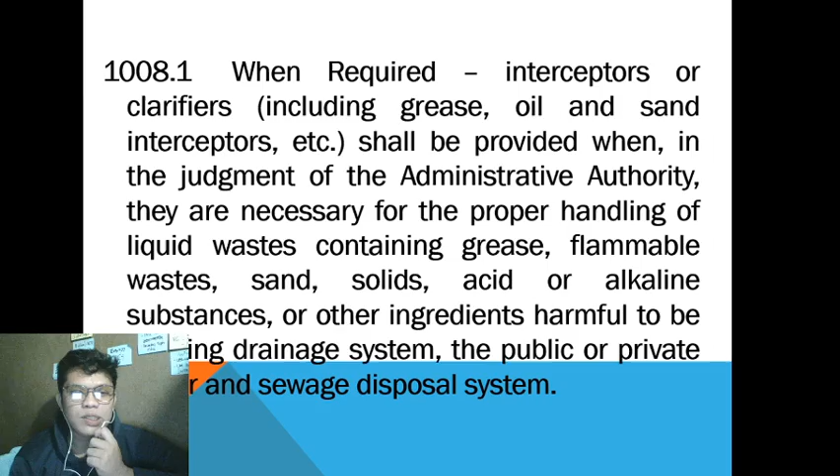We have 1008.1, when required: interceptors or clarifiers, including grease, oil, and sand interceptors, etc., shall be provided when, in the judgment of the administrative authority, they are necessary for the proper handling of liquid wastes containing grease, flammable wastes, sand, solids, acid or alkaline substances, or other ingredients harmful to the building drainage system, the public or private sewer and sewage disposal system.

We have point two, or the approval. The size, type, and location of each interceptor, clarifier, or separator shall be approved by the administrative authority in accordance with its standards, except where otherwise specifically permitted. No waste, other than those requiring treatment or separation, shall be discharged into any interceptors or clarifiers.

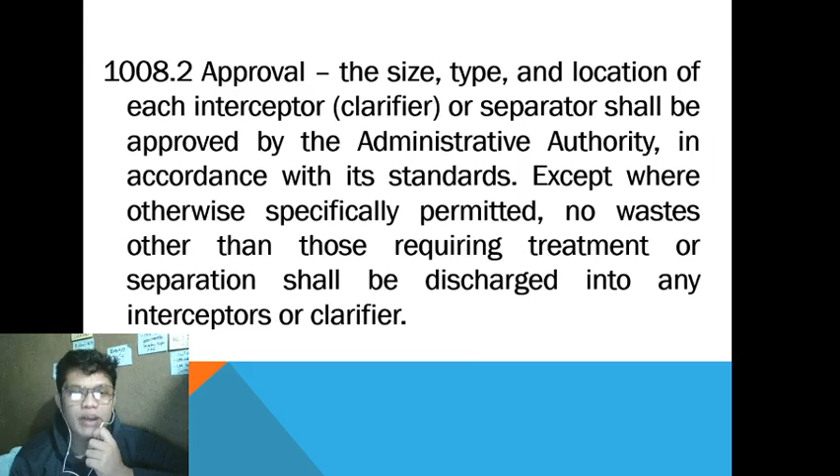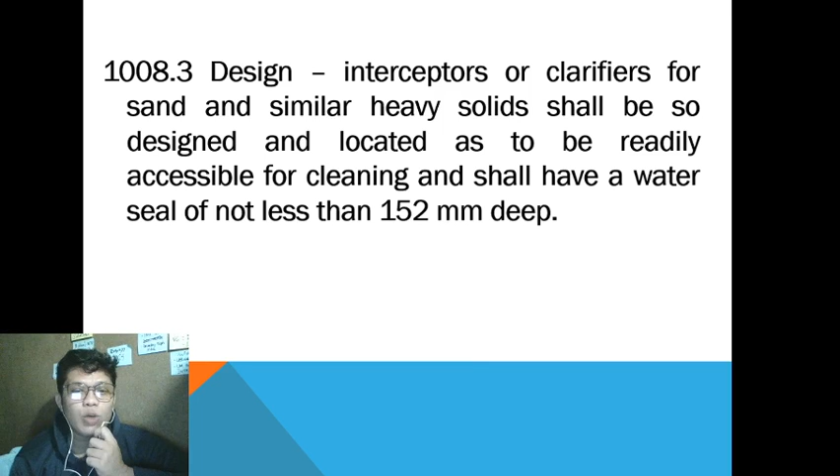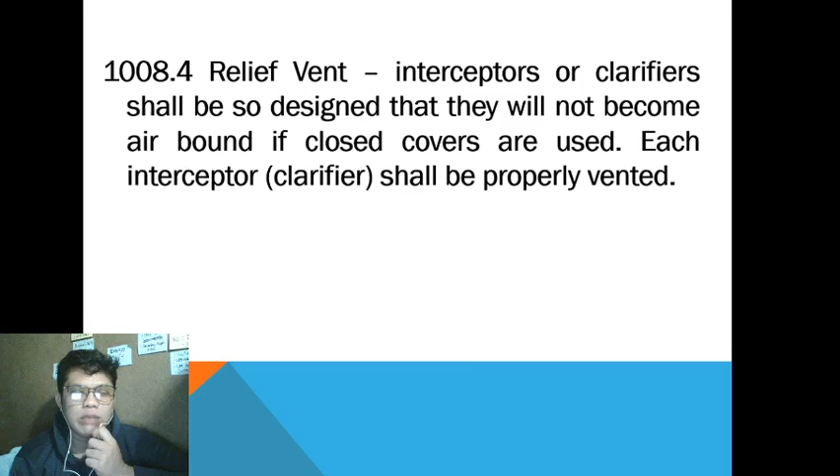We have point 3, or the design. Interceptors or clarifiers for sand and similar heavy solids shall be so designed and located as to be readily accessible for cleaning and shall have a water seal of not less than 152 millimeters deep. We have also point 4, or the relief vent. Interceptors or clarifiers shall be so designed that they will not become airbound if closed covers are used. Each interceptor or clarifier shall be properly vented.

We have point 5, or the location. Each interceptor or clarifier shall be readily accessible for servicing and maintaining in working and operating condition. The use of ladders or the removal of bulky equipment in order to service interceptors or clarifiers shall constitute a violation of accessibility. Location of all interceptors and clarifiers shall be shown on the building plan submitted for approval by the administrative authority.

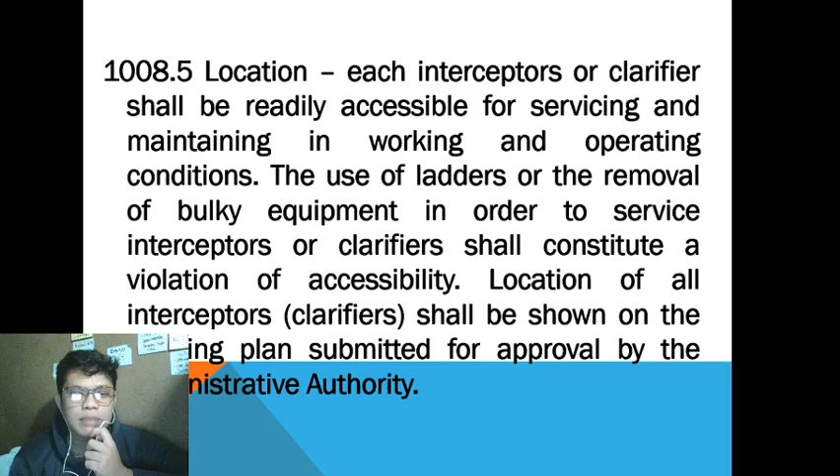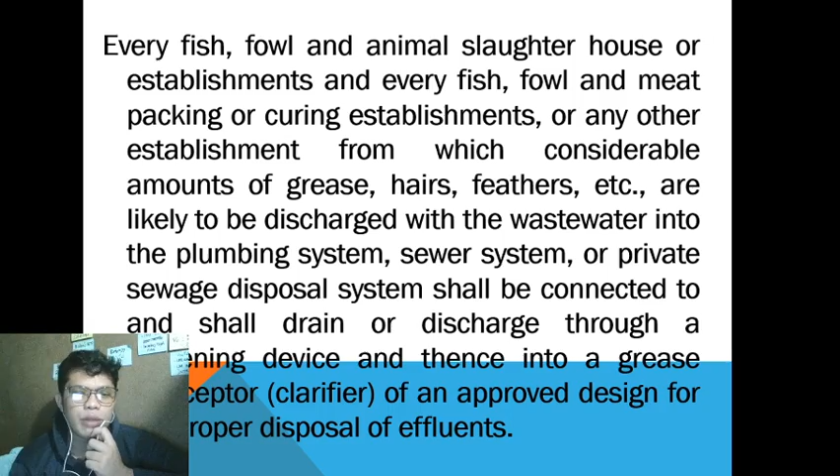Now let's move to section 1009, known as slaughterhouses, packing establishments, etc. Every fish, fowl, and animal slaughterhouse or establishment, and every fish, fowl, and meat packing or curing establishment, or any other establishment from which considerable amounts of grease, hairs, feathers, etc., are likely to be discharged with the wastewater into the plumbing system, sewer system, or private sewage disposal system shall be connected to and shall drain or discharge through a screening device and thence into a grease interceptor or clarifier of an approved design for the proper disposal of effluents.

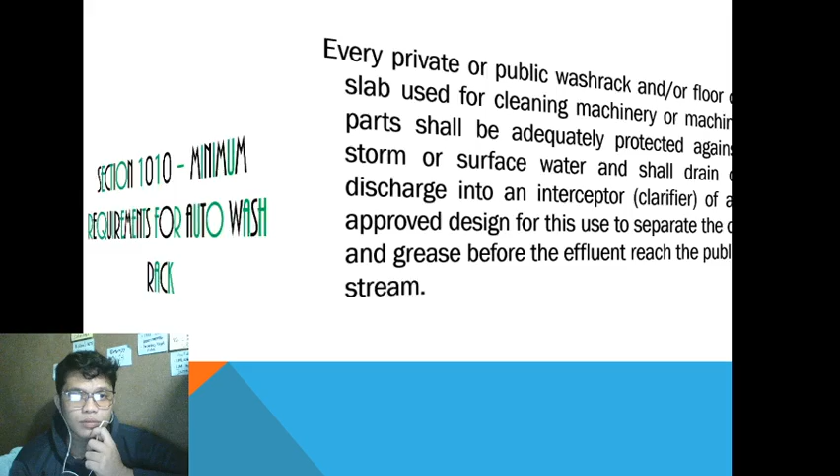Let's have section 1010, the minimum requirements for auto wash racks. Every private or public wash rack and/or floor or slab used for cleaning machinery or machine parts shall be adequately protected against storm or surface water and shall drain or discharge into an interceptor or clarifier of an approved design for this use to separate the oil and grease before the effluent reaches the public stream.

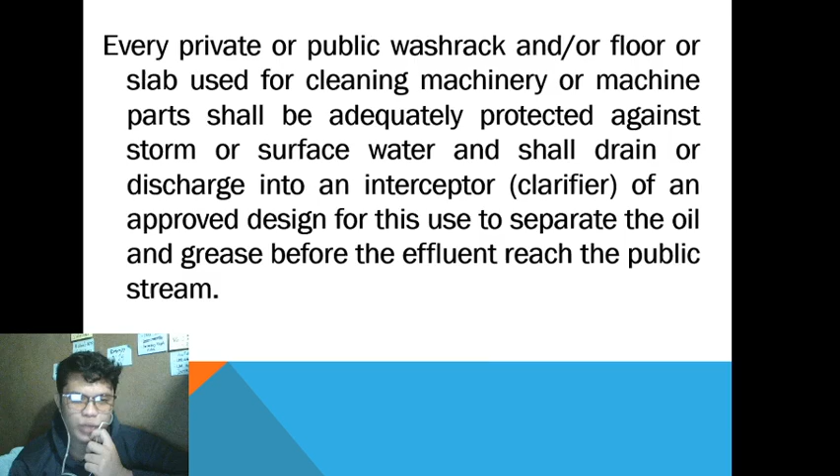Let's move to section 1011, or what we call grease traps. We have actually 8, I guess, if I remember correctly. We have 1011.1. When in the judgment of the administrative authority, waste pre-treatment is required, an approved type grease trap complying with the provisions of these sections shall be installed in the waste line leading from sinks, drains, and other fixtures or equipment

in establishments such as restaurants, cafes, lunch counters, cafeterias, bars and clubs, hotel, hospital, sanitarium, factory, or school kitchens, or other establishments where grease may be introduced into the drainage or sewer treatment or private sewage disposal. A grease trap is not required for individual dwelling units or for any private living quarter.

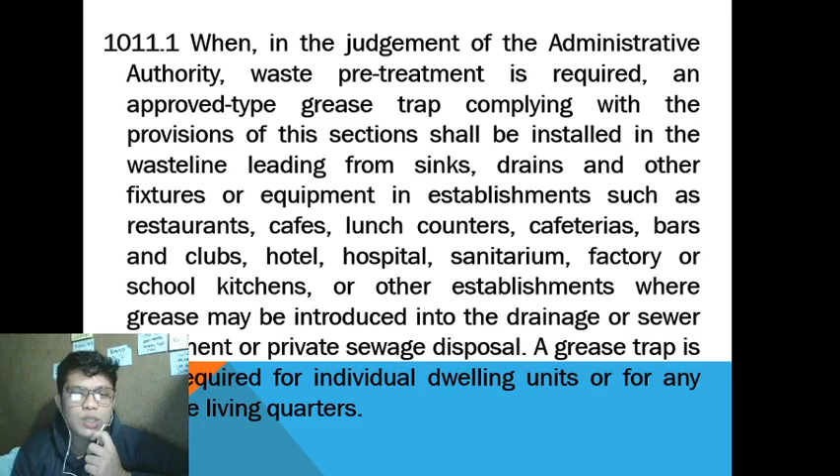We have point 2. No individual grease trap shall be installed for a facility that has an approved rate of flow of more than 3.4 liters per second nor less than 1.3 liters per second, except when especially approved by the administrative authority.

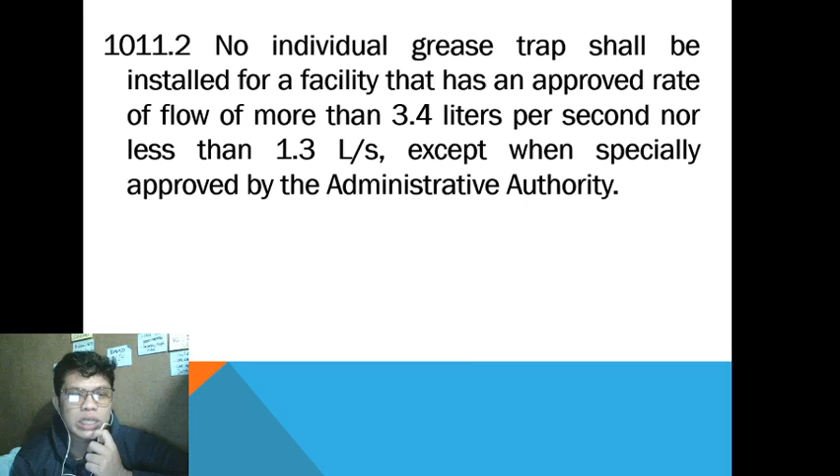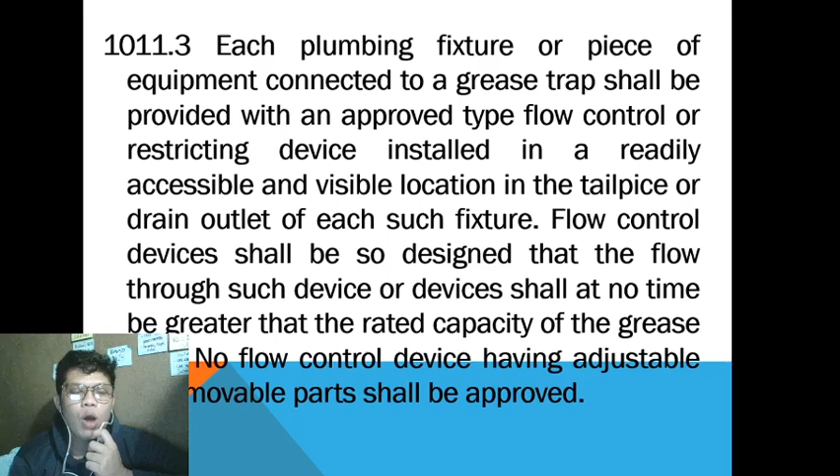Let's have point 3. Each plumbing fixture or piece of equipment connected to a grease trap shall be provided with an approved type flow control or restricting device installed in a readily accessible and visible location in the tailpiece or drain outlet of each such fixture. Flow control devices shall be so designed that the flow through such device or devices shall at no time be greater than the rated capacity of the grease trap. No flow control device having adjustable or removable parts shall be approved.

We have point 4. Each grease trap required by this section shall have an approved rate of flow which is not less than that given in table 10-2 for the total number of connected fixtures.

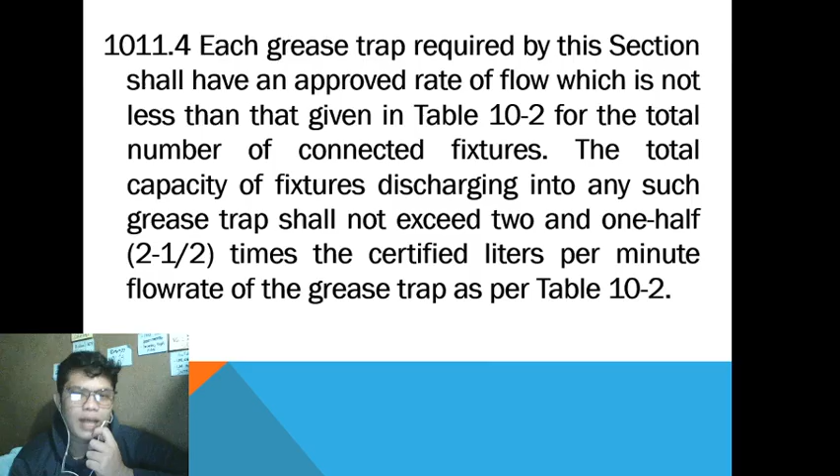The total capacity of fixtures discharging into any such grease trap shall not exceed 2.5 times the certified liters per minute flow rate of the grease trap as per Table 10-2. So, any grease trap installed with inlet more than 1.2 meters lower in elevation than the outlet of any fixture discharging into such grease trap shall have an approved rate of flow which is not less than 50% greater than that given in Table 10-2.

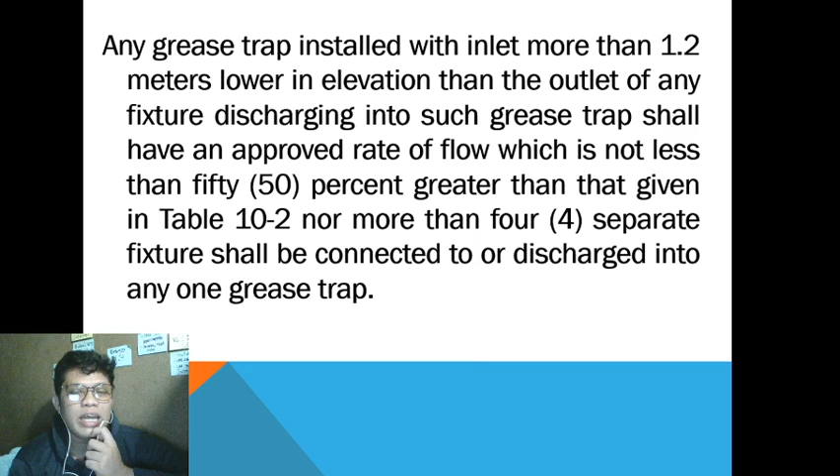Table 10-2. Not more than 4 separate fixtures shall be connected to or discharged into any one grease trap. Also, for the purpose of this section, the term fixture shall mean and include each plumbing fixture, appliance, apparatus, or other equipment required to be connected to or discharged into a grease trap by any provision of this section.

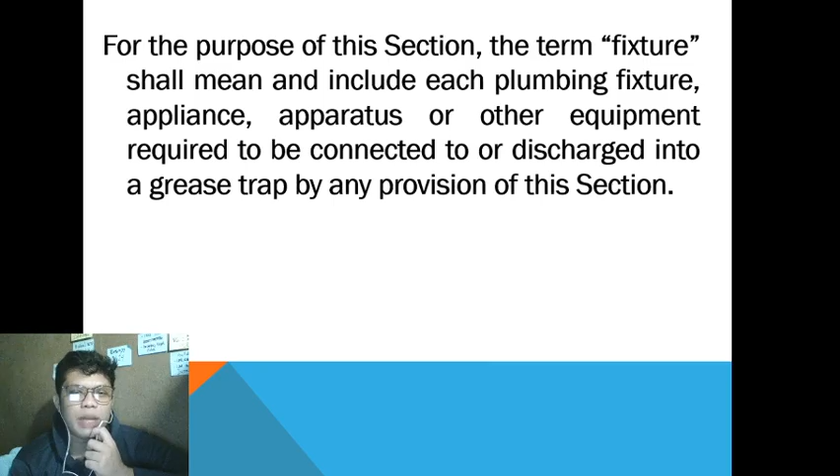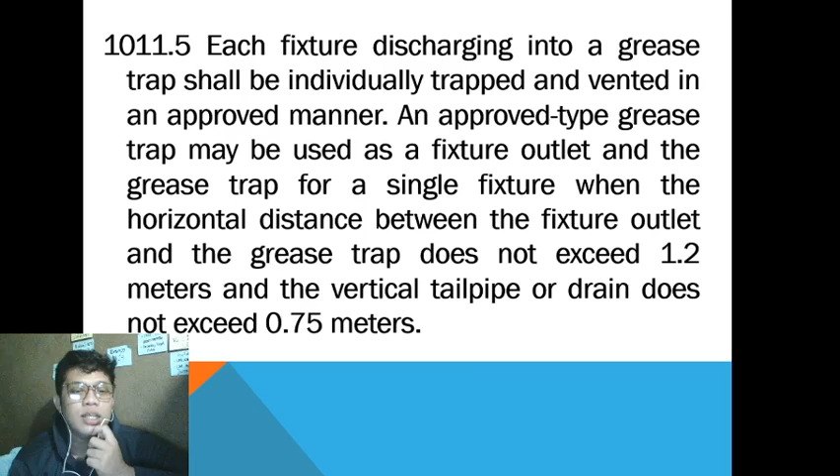So let's move to point 5. Each fixture discharging into a grease trap shall be individually trapped and vented in an approved manner. An approved type grease trap may be used as a fixture outlet and a grease trap for a single fixture when the horizontal distance between the fixture outlet and the grease trap does not exceed 1.2 meters and the vertical tailpipe or drain does not exceed 0.75 meters.

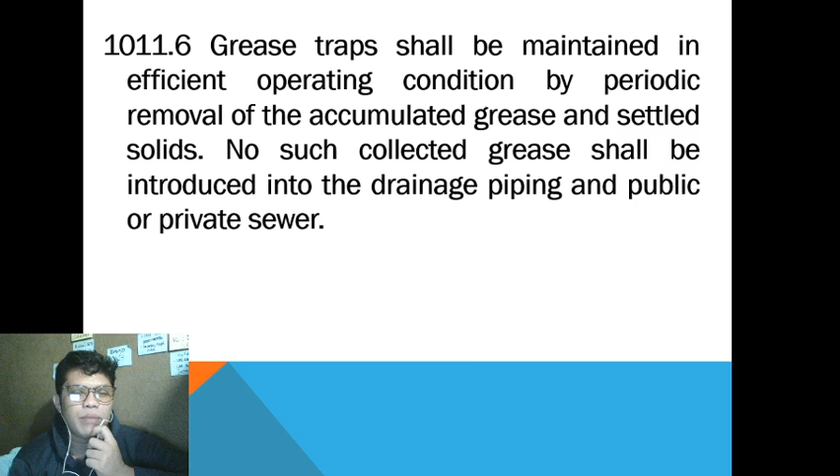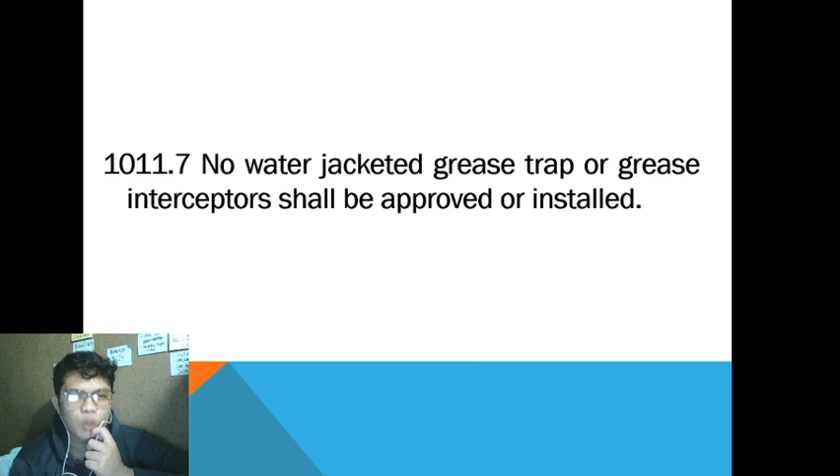We have point 6. Grease traps shall be maintained in efficient operating condition by periodic removal of the accumulated grease and settled solids. No such collected grease shall be introduced into the drainage piping or the public or private sewer. Second to the last, no water-jacketed grease trap or grease interceptor shall be approved or installed. That's according to 1011.7.

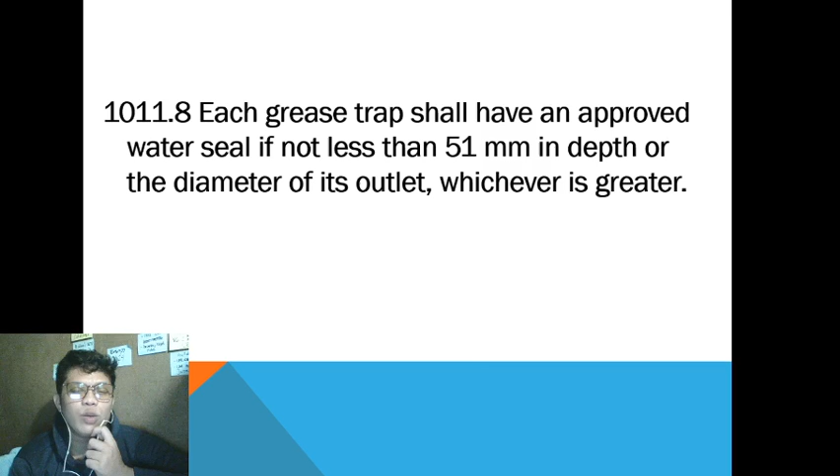And lastly, for 1011.8, each grease trap shall have an approved water seal of not less than 51 millimeters in depth or the diameter of its outlet, whichever is greater. So we have this last section, section 1012, also known as grease interceptors for commercial kitchens. It says that when grease interceptors are required, a commonly recommended sizing criteria is provided in Appendix B,

private sewage disposal system. So I prepared a video from YouTube for us to understand all of this, from section 1008 to 1012. So let's watch the video, and I hope that you will be able to understand some things about the interceptors, the grease traps, and all.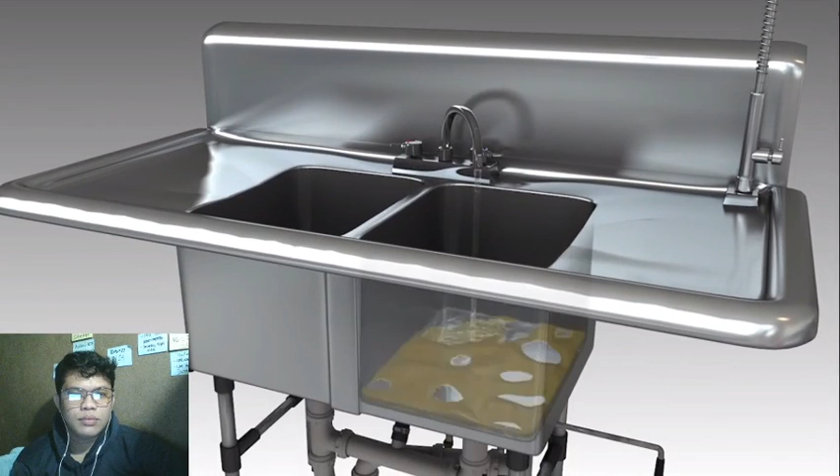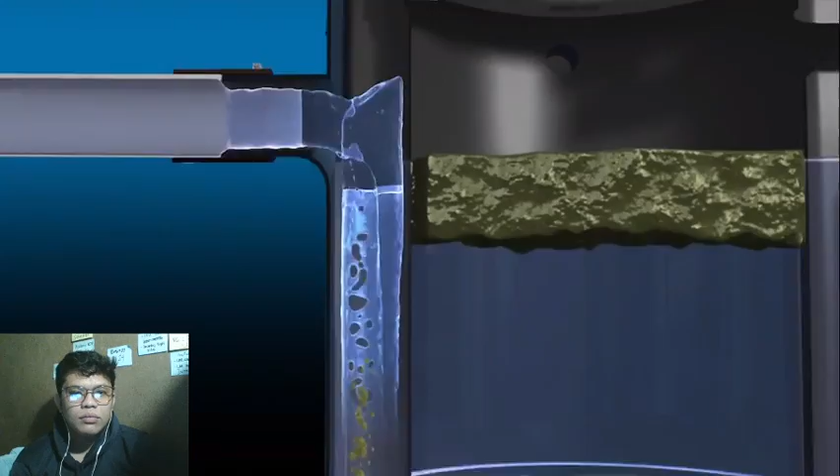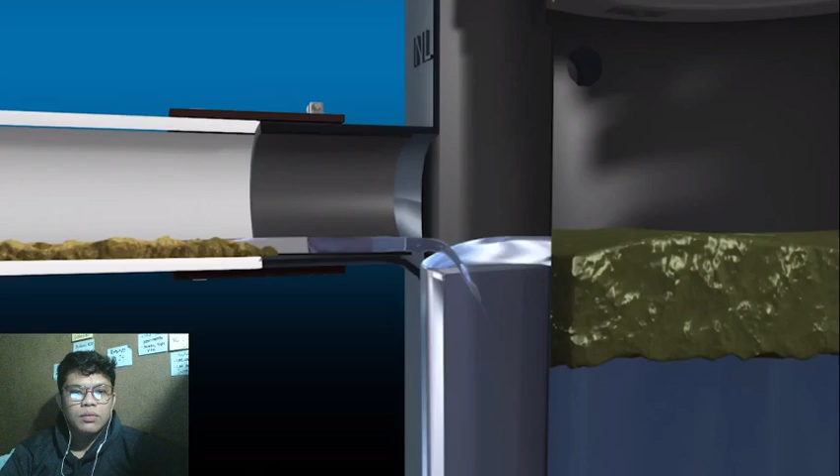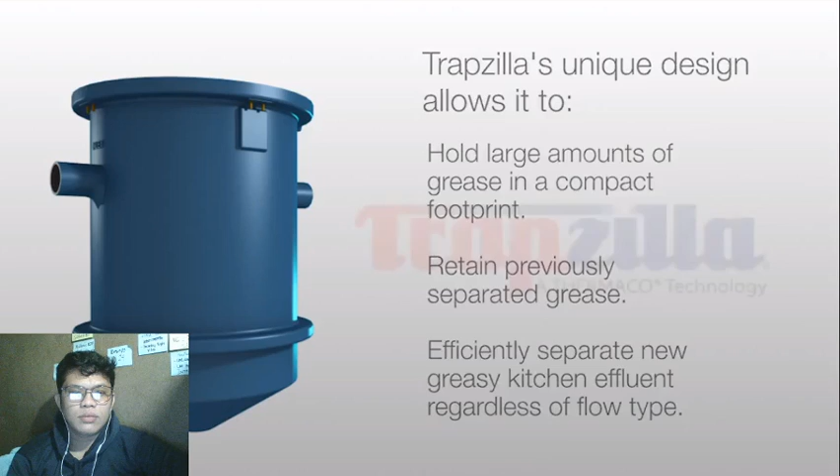Thermaco's Trapzilla Grease Interceptor efficiently treats fats, oils, and grease from kitchen wastewater. Kitchen flows associated with grease often come in two forms... The TRAPzilla Grease Interceptor, a Thermaco technology.

Okay, so that's the summation of my report for today, and I hope you were able to understand one or two things about the report.